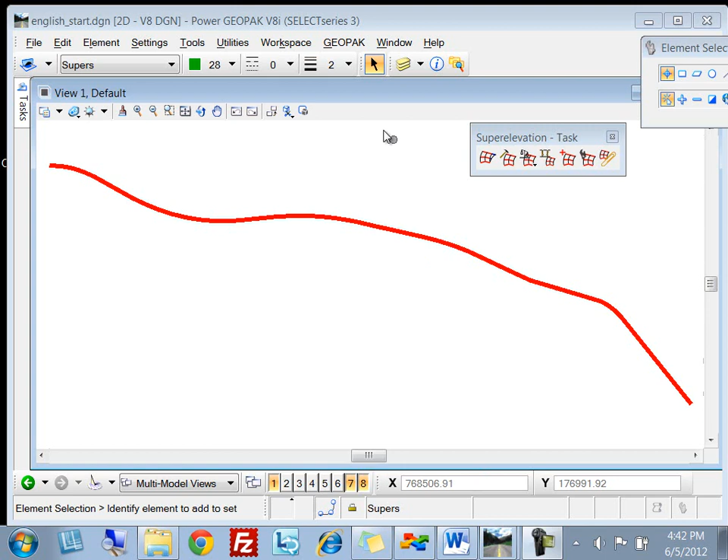In this video, we're going to discuss some of the settings and how to create our sections and some of the subtle nuances about creating them. So let's start first with some of our preferences. We're going to go to our workspace preferences, and the first one is the Superelevation Settings.

We have the options of color shaded fill, boundaries only, and none. The color shaded fill will fill in all of the superelevation lanes with colors. They are hard-coded in and are based on the cross slope, and so the shading will change from a dark blue up to orange and red on the other side of the spectrum.

The boundaries only will draw the outline of the superelevation lanes, and so both of these options you can actually use them to select your superelevation lanes. The none option will turn off all of the superelevation lanes, but it will not delete them, so you can come back here and change one of the other two settings and they will reappear for you.

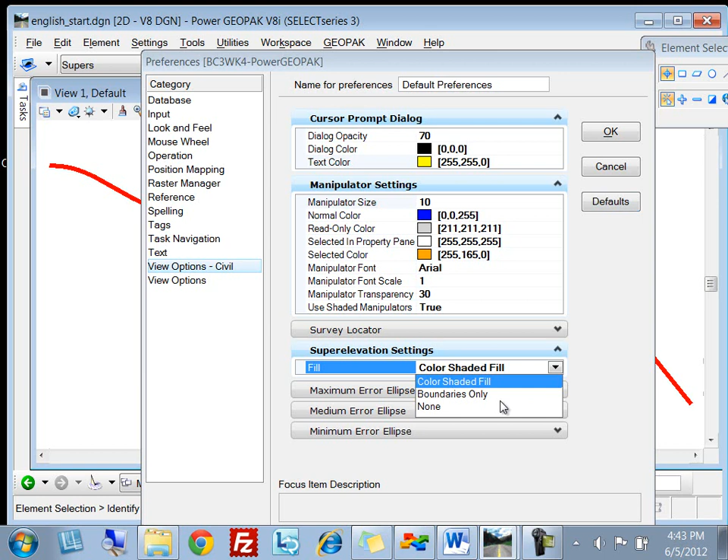Keep in mind, on the color shaded fill, you also have to have the view attributes turned on. So if you're going to use it, make sure you have the fill turned on for whatever level you're drawing your superelevation lanes in.

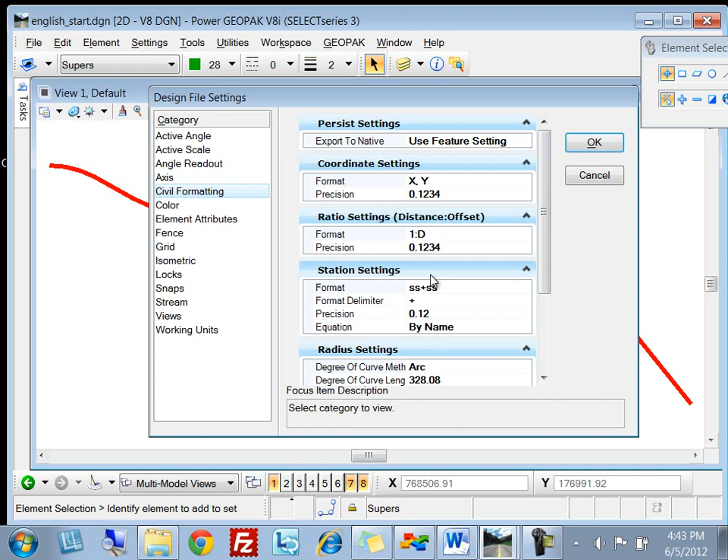The other setting is found under Design File, and what we want to look at is the station settings and the profile settings, in particular the slope precision. These settings control what your element handlers will look like on your superelevation lanes.

And so the precision up under station setting will determine how many decimal places you'll see on the stationing. And the slope precision will show you how many decimal places you'll see on the cross slopes. So if you have a minus 6% cross slope, you'll actually see it in this case as minus 6.00% because it's using the slope precision.

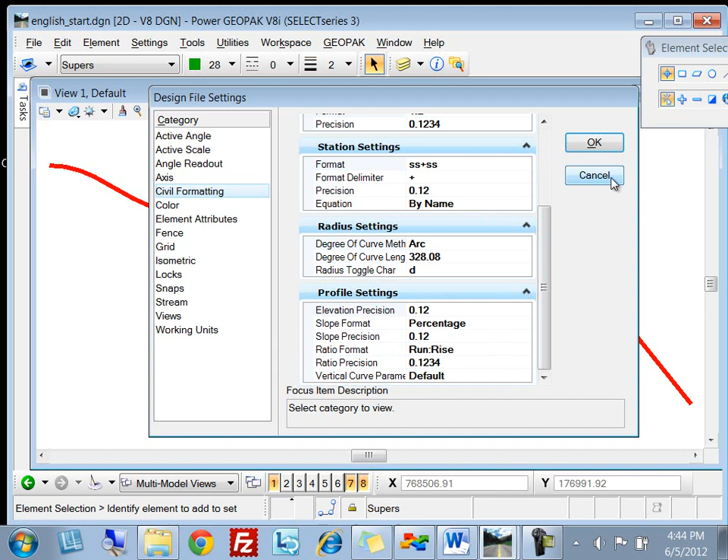And finally, it's going to draw the superelevation lanes onto your active MicroStation level. So in this case, I have it set to a level called Supers, and that's where it's going to draw to. It does not use feature or element templates.

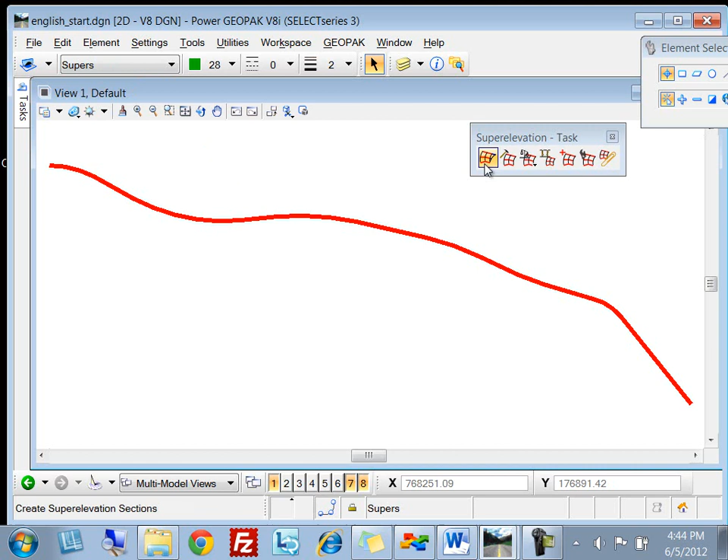Let's go ahead and draw our sections. So I'll select the Create Superelevation Section tool. I'm going to give it a name, in this case my alignment name, which is Main. I'm going to locate my alignment, and I can do my start and stop station. I can either do this graphically or I can key them in.

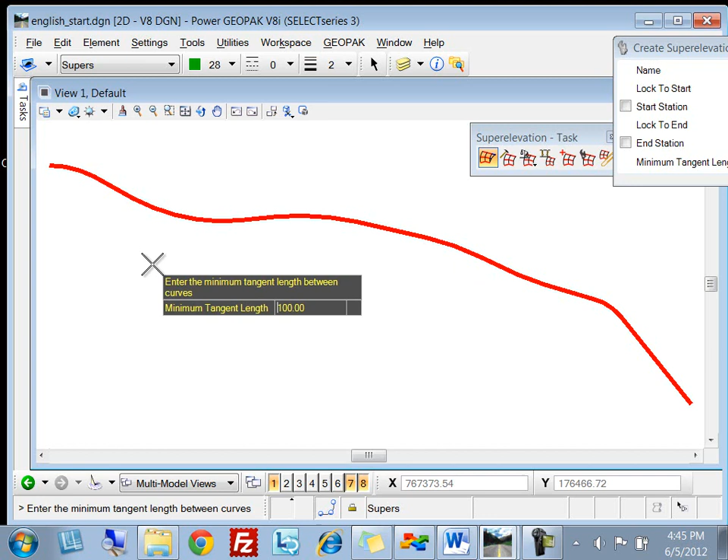And now it wants to know what I want to use for a minimum tangent length. And this is used strictly for setting up my curve sets. And in this alignment I have 6 curves, and it will automatically split them into 6 curve sets. However, if I have a compound curve or 2 curves very, very close together, and I want them to act as one, or I want to be able to update them as one, that's controlled by this tangent length.

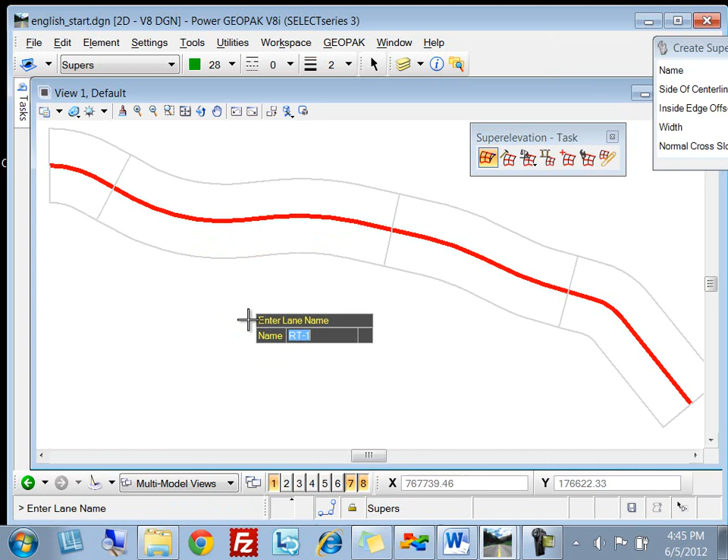So for example, if I set this to 200, you can see that in this second section we actually have 2 curves, and that's because the tangent between them was shorter than our minimum. But now if I undo, and let's go back and do that again, and this time I'm going to go ahead and use 100. Now you can see that it split it all into individual curve sets.

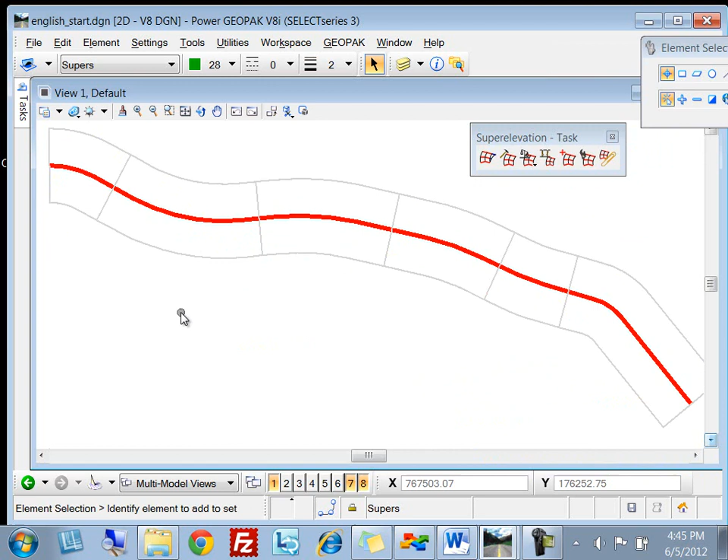And why is that important? Well, because if you want to do an update, let's say for example, this particular curve, I go in and I make a change to it for whatever reason, or I want to change the design speed that I use to do my supers, I can come in and make a change, and then I can reprocess just this one section. I don't have to reprocess the whole thing. So I can do 1 section or 2 sections, whatever is changed.

So if I have a 5-mile long job and I'm doing supers at one end and somebody else is doing alignment changes at the other, they're not going to impact my super calculations.

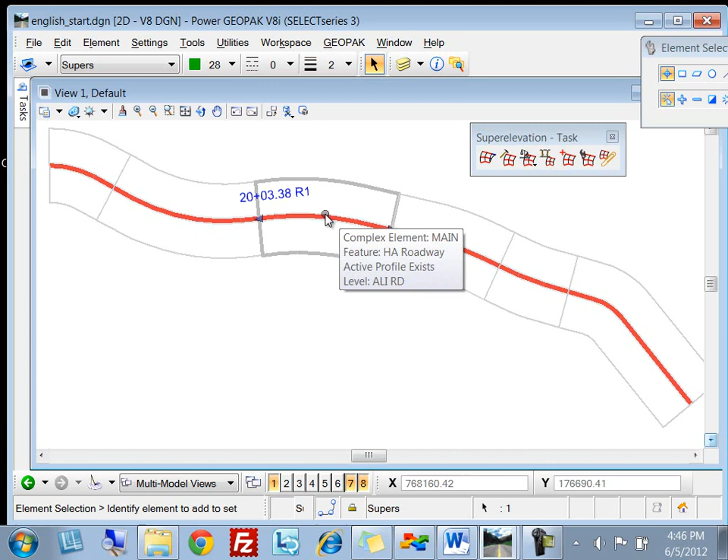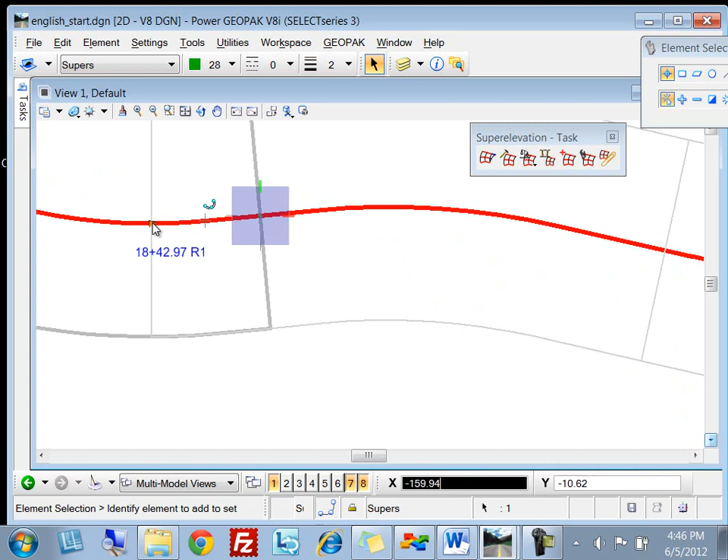Now in this case we can go ahead, and these are editable. You can see that's got the station range on it, and it also has the arrow, so I can grab onto those and I can go ahead and move it down. You'll notice, however, that only moved one of them, so if I want to move both of them, I'll have to slide them together and get them in the same spot. Okay.

So that shows us how we can adjust and create our superelevation sections. And next we're ready to define our superelevation lanes, and that will continue in the next video.